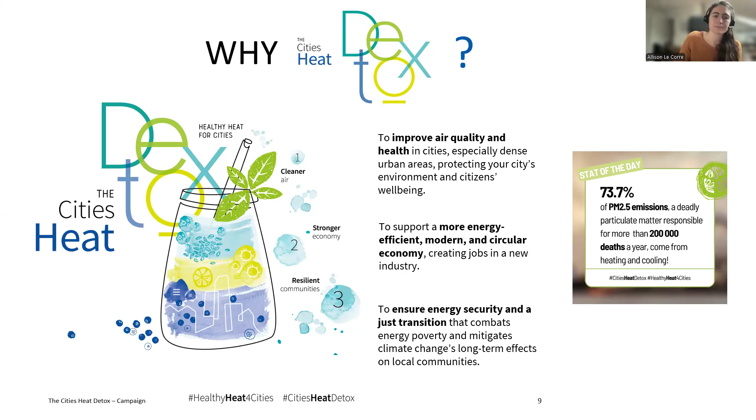What concretely, what can cities do to detox their heat? And the campaign is also promoting the different steps in a city's heat detox, as one would if they're doing a detox, a personal detox.

First and foremost, it's important to know what you are putting in your body and what are these toxic sources. The same way cities, it's important for them to know and map out their heating systems, what the sources are and the possible alternatives, and where they can have a bigger impact and an impactful detox journey.

So here we are promoting all the efforts that cities are doing in planning for their heat decarbonization journey, in line with the obligation of the EED to have heating and cooling plans for cities over 45,000 inhabitants.

So here we're sharing different stories of cities that have very elaborate, already done this work, very elaborate heat maps where they show where they will be expanding district heating, where citizens can connect to district heating, or what other possibilities they have for healthier heat, and where they also plan out their journey.

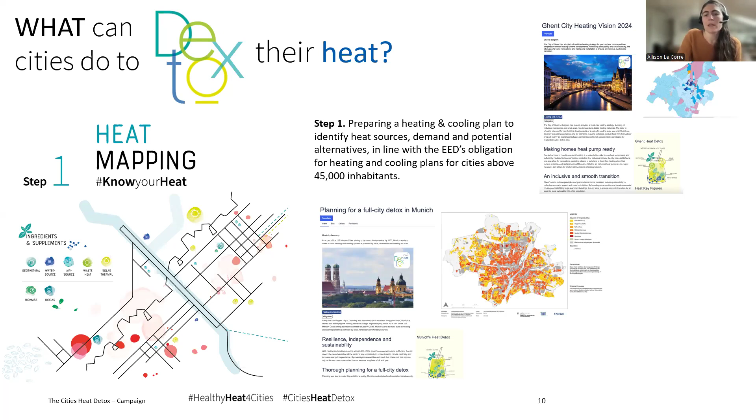The second step to the detox is then trying to go for a full city detox. So as one would try to maybe go for a full body detox, a full body cleanse, here the idea is that cities, by expanding, developing, or renovating district heating networks, can have the most impact in undergoing and really getting rid of these toxic sources.

So here we're also shedding light on different examples of cities that are either starting off with the district approach, such as Leuven, or expanding the district heating networks they have, and those also that are refurbishing and renovating and making them more modern. And thirdly, and not least importantly, once you have these networks and are going for your full city approach, when you know the alternatives, it's really finding these clean sources of heat to feed your district heating systems. So that's the cleansing part of the detox.

And here, the campaign is also trying to showcase with this idea of detox, the different mixes that cities have that are very particular and unique to each city's capabilities and their territories and what they have at hand.

So here you'll see a few examples of cities' detox. What is the base they use? District heating, district cooling, heat pumps, and what are the clean sources that they use to feed that heating? So geothermal, waste heat, solar thermal, or large-scale heat pumps.

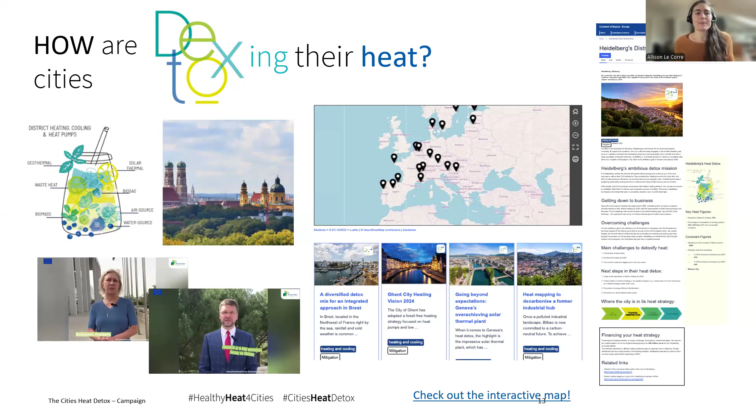Our campaign, as I said, is about sharing stories, and for that I call on you to share your story if you have one you'd like to see on the map. We have two ways of doing this. Either you can apply to the Covenant of Mayors award, which the applications close soon but there's still a bit of time, and there's a series of questions and extra information you can give if you want the application to become a case study featured on our website. If you don't want to apply to the award, or if it's too late, you can also submit your story via template, available in the comms package for cities on our website.

Another way of participating in the campaign is echoing the messages I presented. We have a comms package on our website for partners or anyone who wants to raise awareness around the benefits of decarbonizing heat and the importance of district heating in this effort. You can also subscribe to the campaign to receive regular updates, because as Oksana said, we are sharing all the opportunities we've identified through our campaign partners for capacity building and empowering cities in this journey, including the crash course taking place in June and other webinars leading up to it.

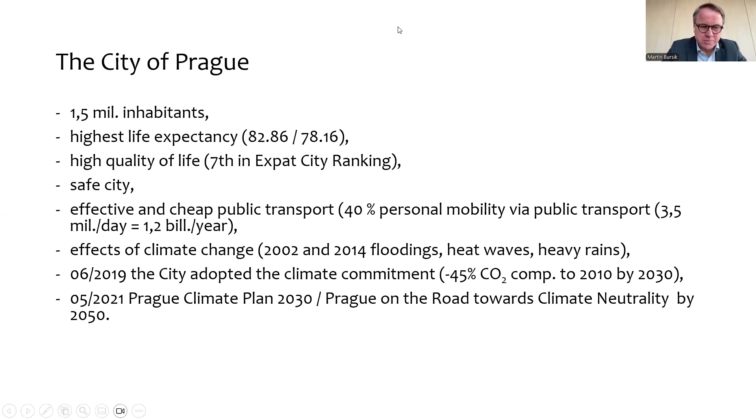Just an introduction of Prague, because you were already invited by Oksana for next June Euroheat Power Congress in Prague. So just for you to know, suppose most of you have been to Prague. Nevertheless, it's a city of around 1.5 million inhabitants with the highest life expectancy. It's a very high quality of life. The expats love it there. It's a very safe city. You can use public transport, which is very cheap and effective. Nevertheless, of course, there are many issues which we inherited even from a communist past, and which need to be addressed.

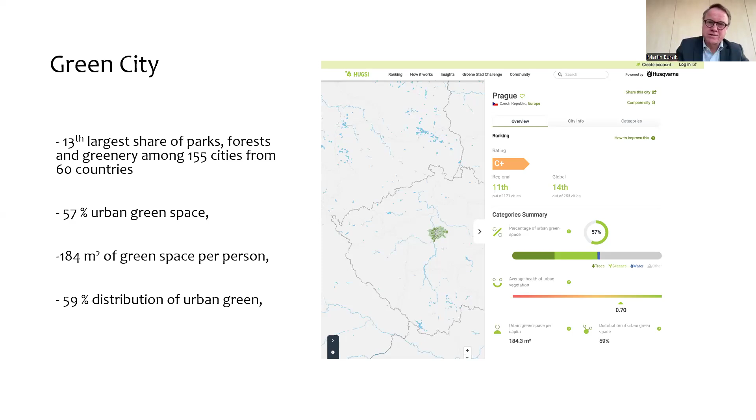We were surprised when we realized that Prague belongs to, according to the Husqvarna index, which is quite funny - the producer of these grass cutters - they set up an index which is a smarter way of identifying how green a city is, so that green areas are affordable and are not just in the surroundings, but also in the center of the city. So this is where we are. This is what you can be looking for in June next year.

We developed the Prague Climate Plan, which has got a target of reducing greenhouse gas emissions, the CO2 equivalent emissions, by 45% till 2030. We followed the IPCC special report, which was published after the successful Paris agreement.

What is interesting, when the Prague Climate Plan was adopted in the city assembly, there were environmental NGOs there, and a Fridays for Future representative was quite negative towards the 45% reduction, saying that the European Union has already got Fit for 55, so the plan is not updated. However, that was a kind of misunderstanding, because our reduction of 45% is compared to 2010, while the 55% reduction of Fit for 55 is compared to 1990.

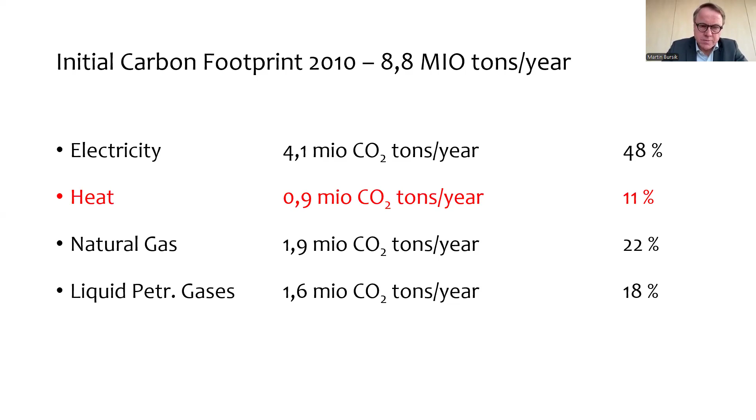The carbon heat, coal heat, is delivered to Prague from a power plant, heat plant, which is 34 kilometers out of Prague. It was built in 1960, then modernized. It's been delivering heat to Prague since 1995, so the carbon intensity of the heat is the highest possible, running on lignite. It is in the ownership of Czech Energy Works.

The problem of the city, which is a very sensitive issue, is that on one side of the tube you have a heating plant owned by the dominant Czech Energy Works, a partly state-owned company, and on the other end of the pipe is Veolia, which also has got no connection with the city.

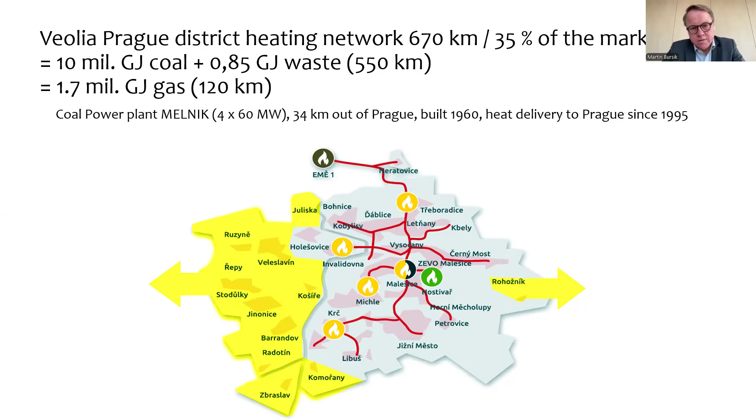Though the name of the utility is called Prague Heat Utility, Prague doesn't have any influence on it. There is a contract between these two companies, which is even unknown. The only thing we know is that this is going to last until 2034, and we also know that there is a plan to switch the power plant Mělník from coal to gas. So this is where we are.

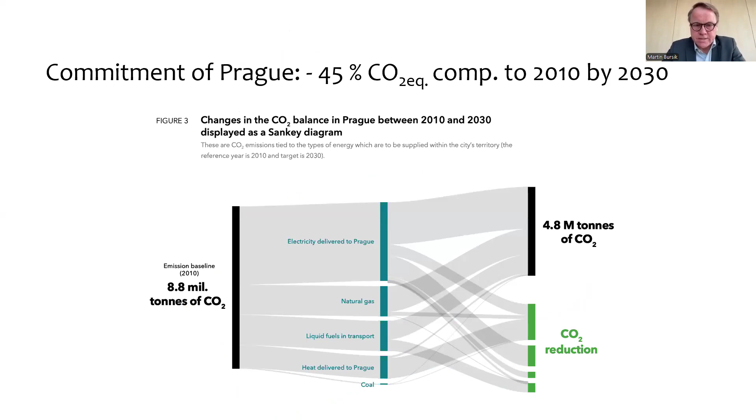So we were, of course, very much thinking how to get to this reduction of 45%. You see the Sankey diagram, which shows what we can do in the electricity part, natural gas, liquid fuels, and heat. So this is where we got.

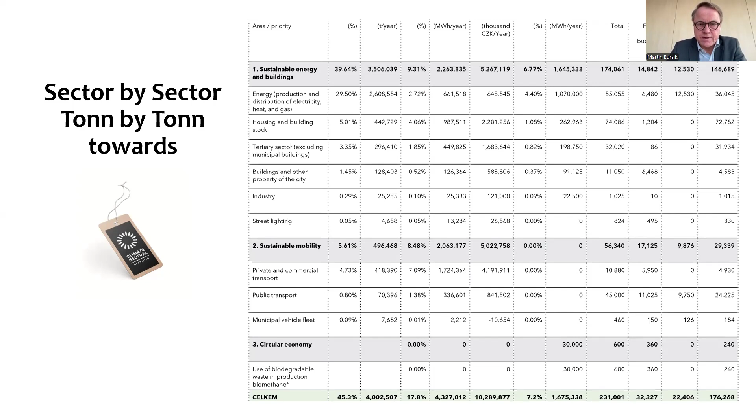And here you see the potential. The highest potential, of course, is in energy and in housing and building stock. What we did is use a number of Excel sheets of calculation to test if we were really able to reach this 45%, and we got it. As you can see, almost 40% potential is in sustainable energy and buildings, with a dominant part being heat and electricity.

The Prague Climate Plan is also available in English on the web page, called climate.prague.com, and the climate plan consists of 69 concrete measures in 4 areas: sustainable energy, mobility, circular economy, and adaptation to climate change. We have some, call them lighthouse projects, through which we want to show the innovation, to get the citizens of Prague on our side, to get business on our side, to make it clear that the change is possible.

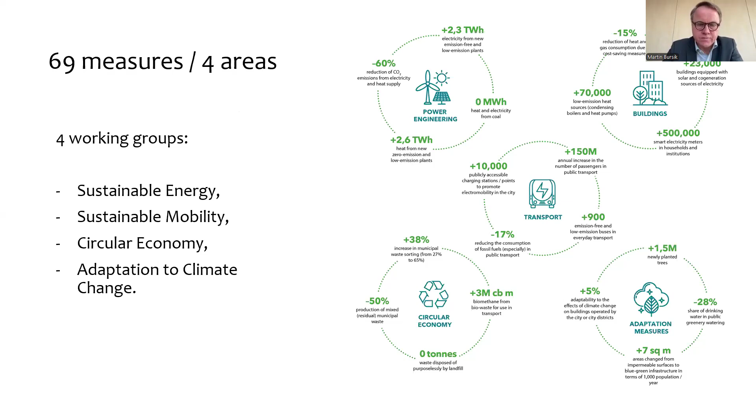So just to mention some of them, we founded the Prague Renewable Energy community, and we are already sharing the surpluses of renewable electricity from one side to another, and others.

Then, because we had very limited options to influence the primary source of this dominant central heating, we started the project preparation of a new energy center, as we call it, which is going to be built at the location of the central wastewater treatment plant, which treats 93% of all wastewater of the city.

Out of 1.4 million residents, and we expect the population of Prague to rise. So this wastewater treatment plant will be modernized, the capacity will increase, and as you can see on the map, it's on an island on the Vltava River. So it's a fantastic location for a wastewater treatment facility.

The water leaving the wastewater cleaning process has a temperature 10 degrees centigrade higher on average than the temperature of the Vltava River. So there is big potential, and the flow of water is 3 cubic meters per second.

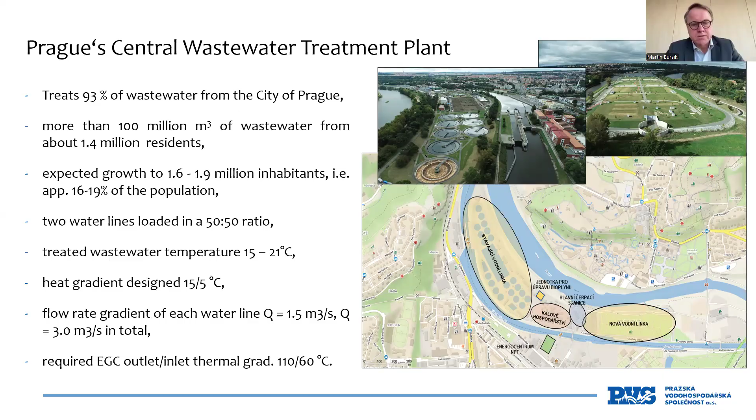So we started to work on a project to build industrial heat pumps at this location. The potential is 180 megawatts with water at a temperature of 90 degrees centigrade. Just to compare it with the existing coal-run source, this could cover one third of the energy delivered so far by coal. So this is not negligible.

We visited with a team of experts and also politicians. We visited Helsinki, we visited Stockholm to see where these industrial heat pumps have already been in operation for dozens of years. And then also Vienna.

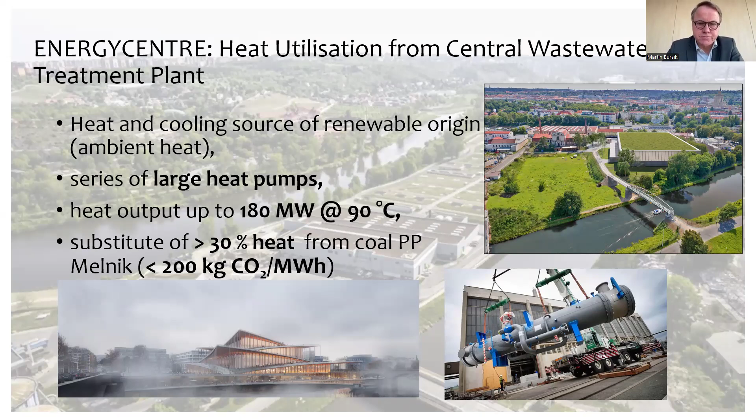The picture on the right is of the installation of an industrial heat pump in Vienna. The first phase of the project has already started. The picture on the lower left is just an imagination—it doesn't exist yet. It's a new building of the Czech Philharmonic, which will also be on a bank of the Vltava River. On the upper right, you see the visualization of the energy center, covered with grass, next to the wastewater treatment plant.

The issue is how to get this clean, renewable heat into the grid, and this is a big question, because according to the Renewable Energy Directive, the operator of a central heating system has an obligation to connect and feed in heat produced either from renewable energy, ambient heat, or waste heat. However, in reality, this directive was transposed into Czech legislation only with respect to the first part—renewable heat—but not the heat produced from waste.

This is just an example of the power of existing utilities, which are running heat on either coal or switching to gas.

It's also important to mention that Czech Republic is in a phase of transforming from coal to gas. Czech Republic is one of the 10 countries of EU 27 which, according to European legislation, has got a so-called modernization fund, a very robust economic vehicle where 4% of the turnover of EU ETS in Europe is shared among these 10 countries.

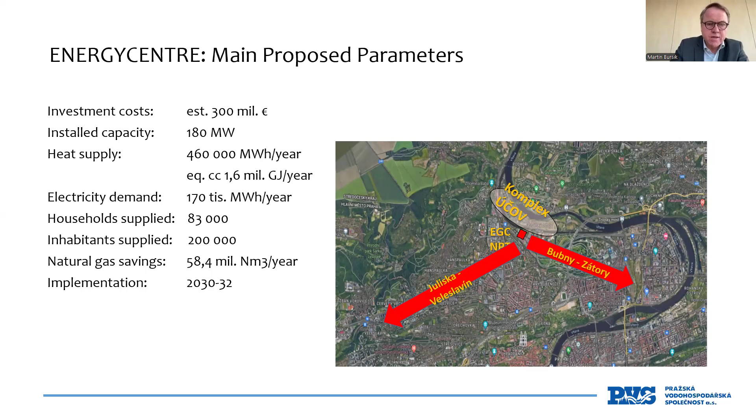And then we have a calculation of natural gas savings and the year of implementation.

Another project, which is already in operation, is a pilot project producing biomethane from sludge, but not just biomethane - we also clean it to bio-CNG. There is production of 1 million cubic meters per year. It's just a pilot. What's interesting is the red line you see on the map down there.

This shows how we connected the biomethane station to the grid. The bio-CNG is pumped into the grid, but the issue was that biomethane has a lower energy content. According to Czech legislation, there was a necessity to so-called propanize it - to mix it with propane so it has the same energy content as fossil natural gas, which is a crazy idea.

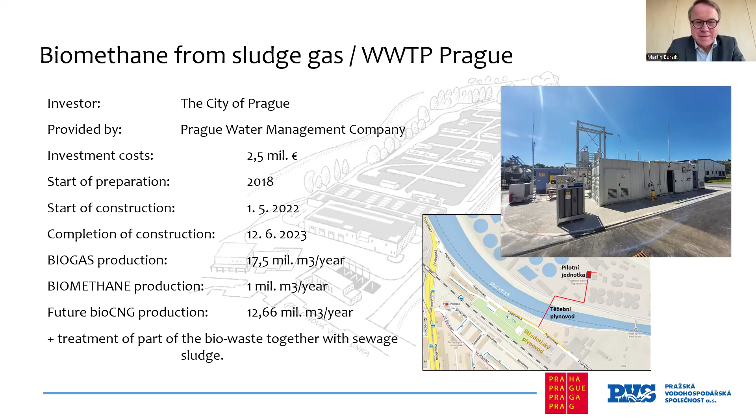You have clean biomethane from a renewable source of energy, and then you mix it with propane, which is a fossil gas. So we did it the other way around. We made a mathematical model showing the hydraulics, which calculates the energy content in every cubic meter delivered to a certain place. This is how we avoided mixing the renewable biomethane with fossil propane.

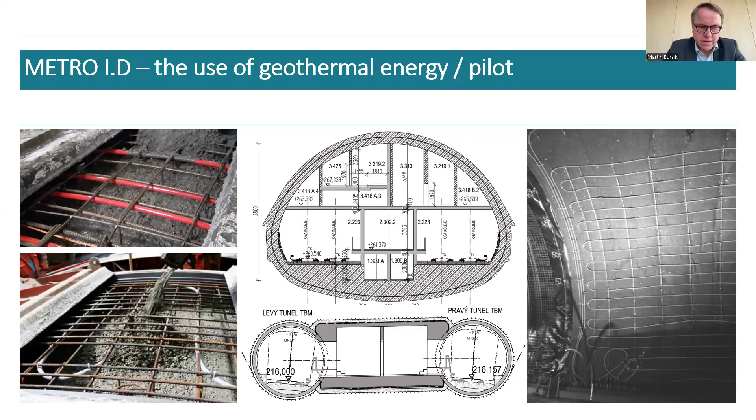The third, last but not least, project, also under preparation, is the use of geothermal energy from the underground line. Prague has started building the new metro line I.D, and the idea is to use geothermal energy from the underground. There are two ways the tunnels and stations are being built: either they are embossed or done from the surface.

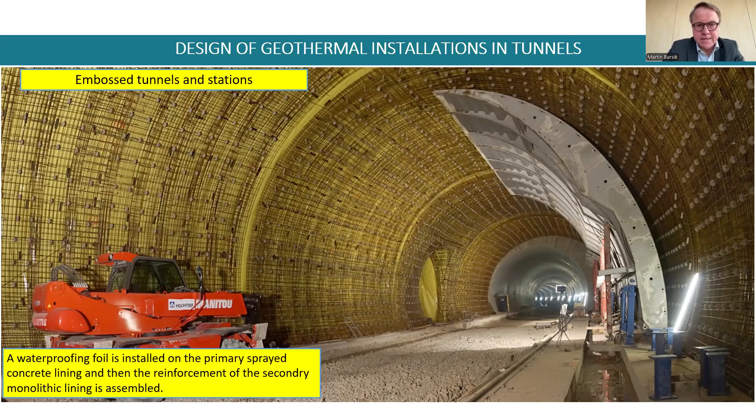These examples show that there are two linings, one next to another, and in the internal secondary monolithic lining, an energy mat can be assembled where we collect the energy, and then use it through geothermal heat pumps for surface heating and cooling. This shows how the absorber pipe is connected to the lining, and we have examples from the underground in Vienna.

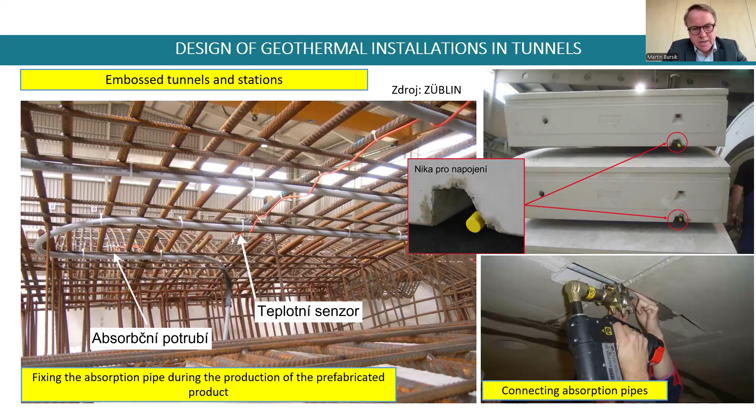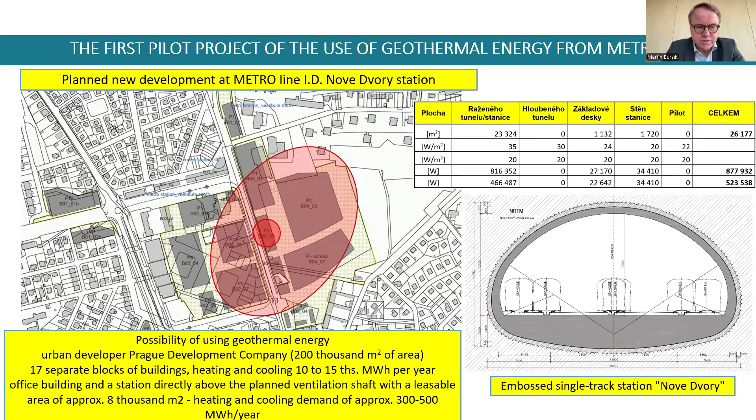The development plan being developed by the city of Prague shows the need for energy which is much, much, much higher than what we develop here.

But we just want to show that this could be a natural part of any projections where construction is being projected underground. So then, of course, there is the potential of geothermal heat to use and to substitute fossil fuels, and to offer the citizens clean, detoxed heat.

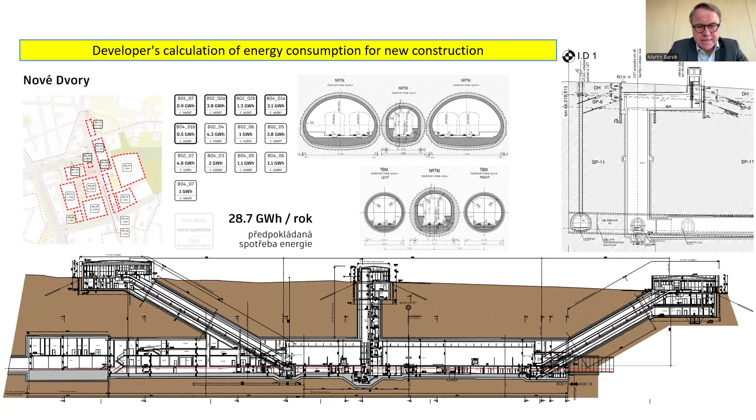So thanks very much for your attention. Of course, I'm prepared to answer your questions if I am able.